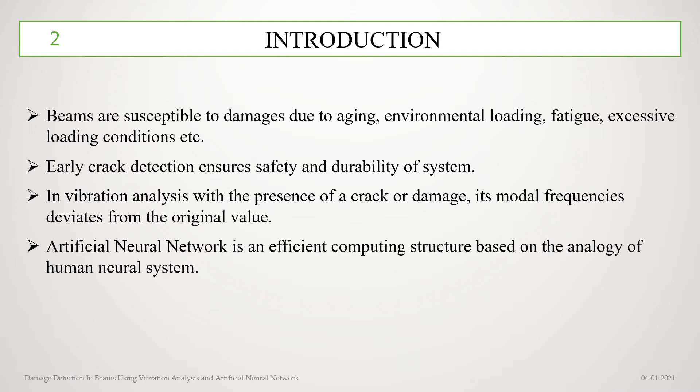In vibration analysis, with the presence of a crack, the modal frequency deviates from its original value. So this was the parameter considered for crack detection. An artificial neural network is an efficient computing structure based on the analogy of the human neural system. Neural networks are a set of algorithms designed to recognize patterns.

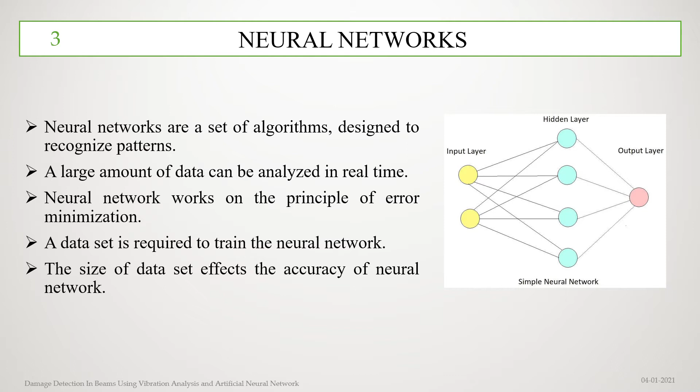A large amount of data can be analyzed using ANN. It works on the principle of error minimization. A dataset is required to train a neural network, and the size of the dataset determines the accuracy of the neural network. The detection of cracks is broadly carried out using NDT methods, vibration-based methods, and various mathematical models.

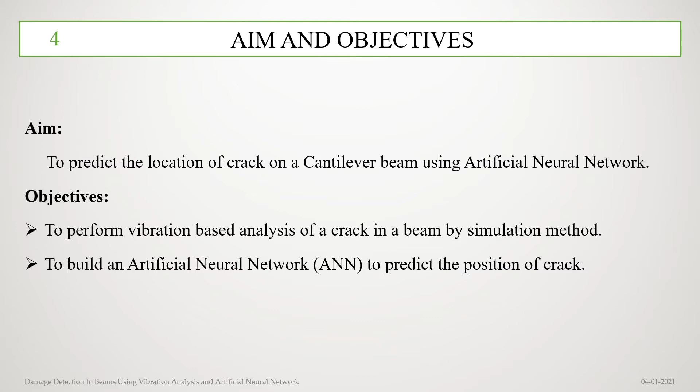Hence, with long-term data collection, accurate damage diagnosis is a computationally challenging task. Use of ANN makes it easier to carry out this detection. So the aim was to predict the location of a crack on a cantilever beam using ANN. The objective was to perform vibration analysis of a beam with a crack by simulation methods using ANSYS and to build an ANN to predict the position of the crack.

Literature review. The first paper reviewed was damage assessment in structures from changes in static parameters using neural networks. Key findings were that the neural network can be trained for damage detection in a cantilever beam using its strain and displacement. More accurate results were obtained when strain was considered as an input.

The second paper is experimental investigation of crack detection in a cantilever beam using vibration analysis. The key findings were that detection of crack location can be done with the help of change in natural frequency and amplitude. With increase of distance of the crack from the fixed end, the natural frequency increases.

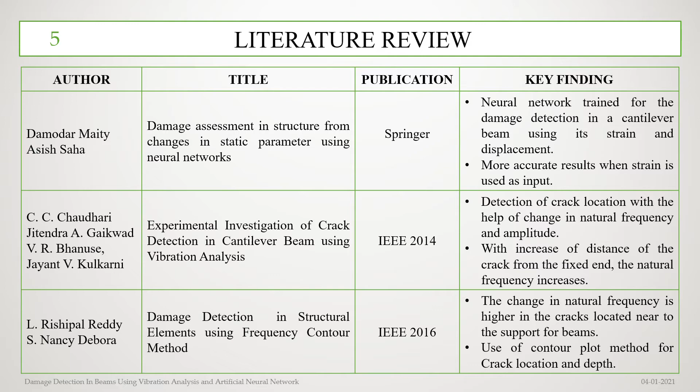The third paper is damage detection in structural elements using the frequency contour method. The change in natural frequency is higher for cracks located near the support of the beams. Also, one of the key findings was the use of the contour plot method for crack location and depth.

The next paper is investigation of the effect of transverse crack on modal properties of cantilever beams with different geometries using FEA. The key findings were that introduction of a crack reduces the natural frequency of vibration. The effect of crack location and depth on natural frequency is not similar for all the modes for beams with different cross sections.

The next paper is crack detection in a cantilever beam by natural frequency tracking using experimental and finite element analysis. Here the finite element analysis was carried out by considering a probe on the beam as well as without considering a probe. The error analysis showed that considering the probe, the error range was between -2.07% to 3.68%, whereas without considering the probe it was -2.88% to 2.62%. In our analysis, we have not considered the beam with a probe.

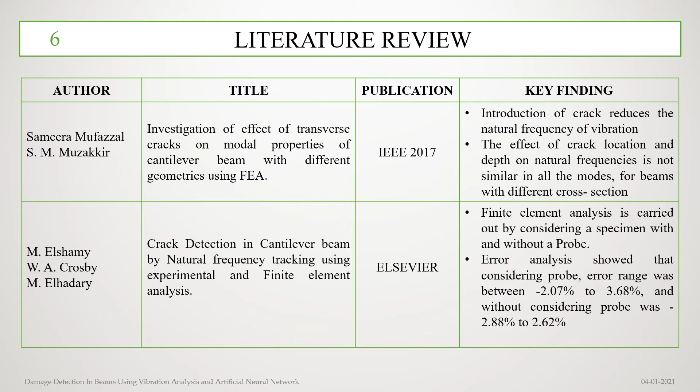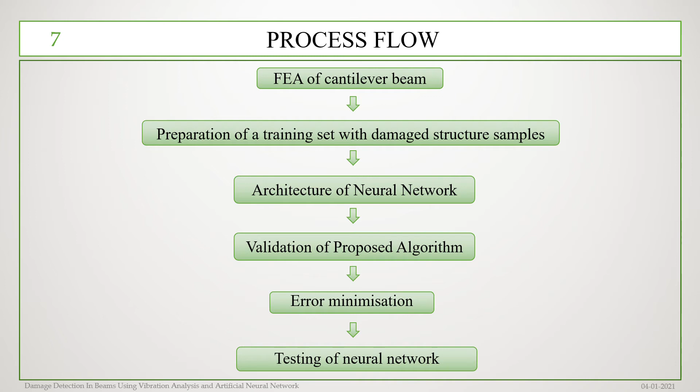Coming to the process flow, the initial step was to carry out modal analysis of the healthy beam to obtain its mode frequencies. Then modal analysis of the cracked beam was carried out for different crack locations and a dataset of their mode frequencies was obtained. After the dataset, work on the architecture of the ANN was carried out. Then validation of the algorithm was done using the existing dataset and changes were made in the neural network for error minimization. Finally, the ANN was tested using a test dataset.

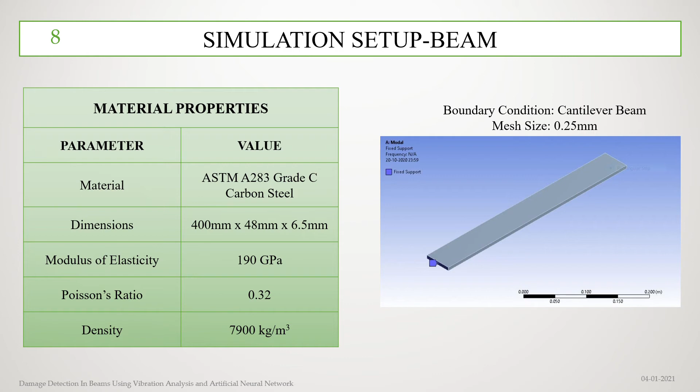Coming to the simulation setup, the beam was fixed at one end. The dimensions of the beam were 400 mm by 48 mm by 6.5 mm. Mesh size considered was 0.25 mm. Material was ASTM A283 grade C carbon steel. Its modulus of elasticity was 190 GPa, Poisson's ratio 0.32, and density 7,900 kg per meter cube. These are the results for modal analysis of the healthy beam. The first four bending mode frequencies were obtained.

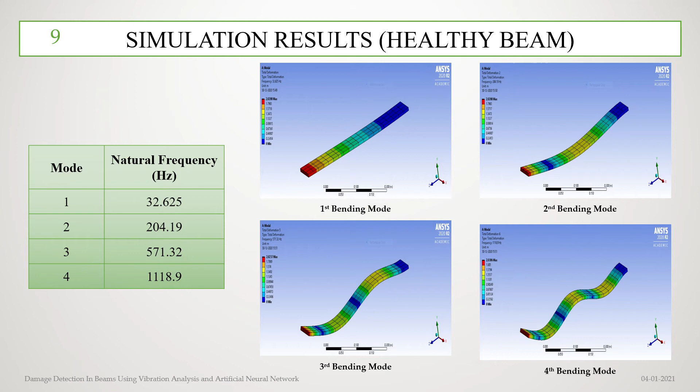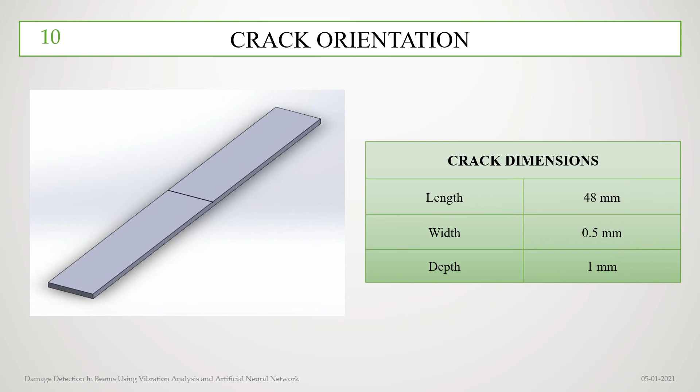Coming to crack orientation, the crack length considered was 48 mm, that is, the crack was considered along the width of the beam. The width of the crack is 0.5 mm and the depth is 1 mm. The location was considered at an interval of 5 mm from the fixed end, so the dataset obtained was for 79 different crack locations.

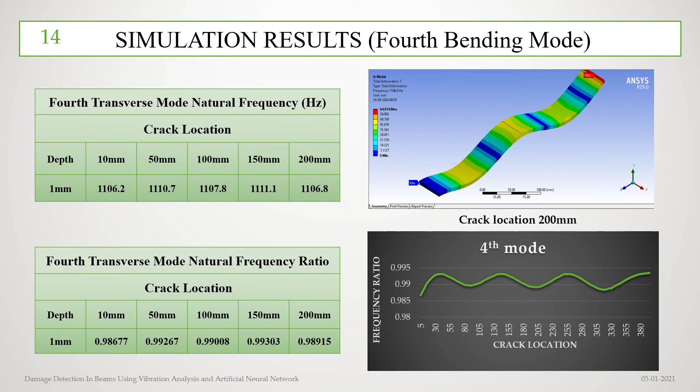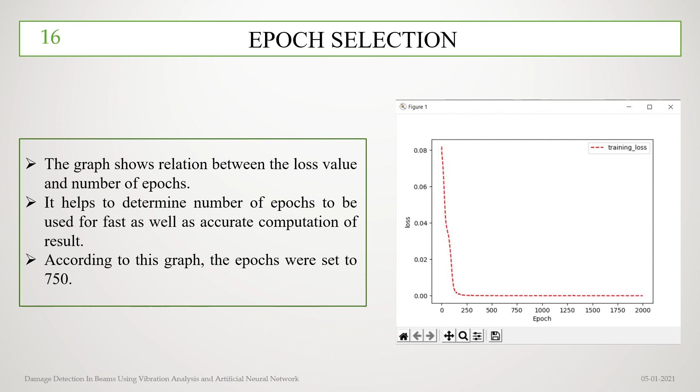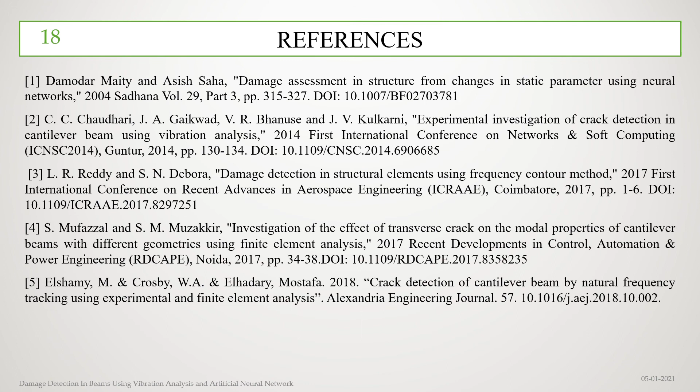So to summarize, the ANN was trained with frequency ratio values obtained by vibration analysis and was used to locate a crack in a cantilever beam. The training set can be further increased to achieve more accuracy. These were the references for the papers.